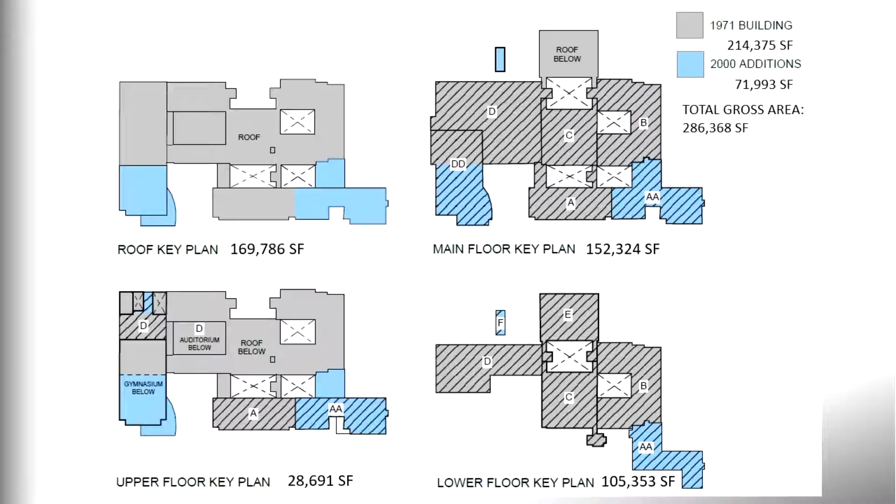There's some interior courtyards, one of which is just outside the window here. So there's a lot of surface area that we need to look at. The color coding is simply just to show you what parts of the building are original and what parts have been added to.

So now let's get into some of the work items. We'll start with scope number 1, our highest priority items. We'll start with roofing - roofing is a big issue here. You can see in the images that we're getting a lot of ponding, which is that water that won't drain. The roof is over 20 years old, and it's just about the end of its useful life.

There are several active and ongoing leaks in the building which are being managed, but leaks don't stop until they're fixed. So we would clearly recommend replacing the roofing in its entirety. As you can see, those are some pretty big numbers, probably almost 10 million there between the two sections of the building.

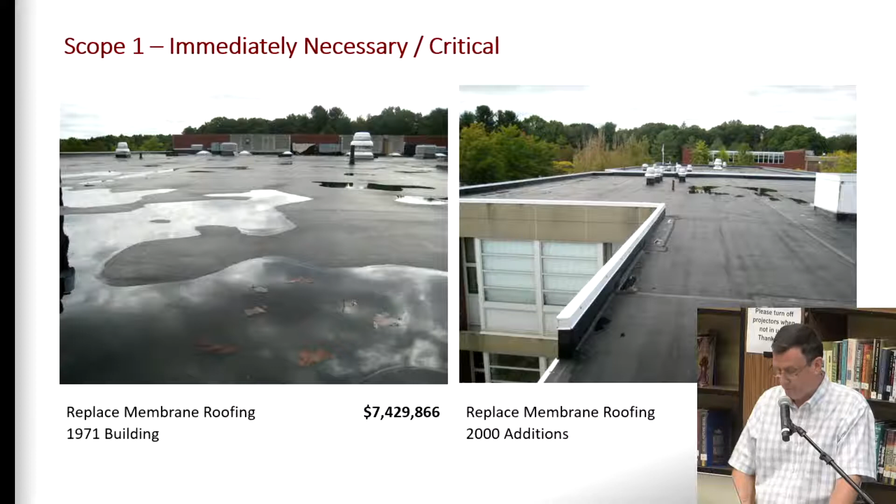Also, up on the roof, we have a lot of our mechanical equipment. This is the equipment that provides heating, ventilation, and cooling. This equipment is also just about the end of its useful life. They're becoming increasingly expensive to maintain. The type of refrigerant used in some of the units is being phased out because of its contribution to greenhouse gas emissions. Units are not being manufactured with that type of refrigerant anymore. And the units are not nearly as efficient as a new unit that we could engineer today. The technology has evolved quite a bit.

You can also see on the image on the left that there's some ductwork that runs across the roof. There's quite a lot of this. That ductwork should be insulated to keep that thermal energy inside the duct where it belongs so it can be delivered to the spaces below. But that insulation has completely failed. In some cases, it's just gone. In other cases, as you can see there, it's falling apart and crumbling. So there's a lot of energy being wasted here.

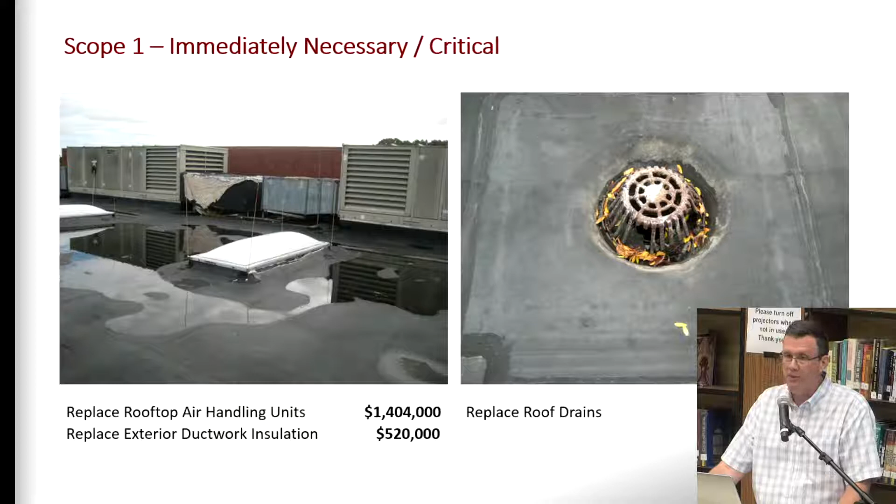I group these with the roof, and the roof drain falls into this category as well, because it's often cost effective, if affordable, to address replacement of the rooftop mechanical units at the same time as replacing the roofing membrane. The reason why is because in order to flash things properly, what we want to do is temporarily take those units off of their curbs, put the membrane in properly, and then put the unit back on. But of course, that costs money. So if it is affordable in the budget, what we recommend is to consider replacing those units at the same time as the roof. Altogether, that's going to save you money.

Other Scope 1 items: the egress doors around the perimeter of the school are in pretty rough shape. A lot of them are rusting. They're not weather tight, they leak constantly, and they're causing damage to the interior just beyond the threshold, affecting the floor.

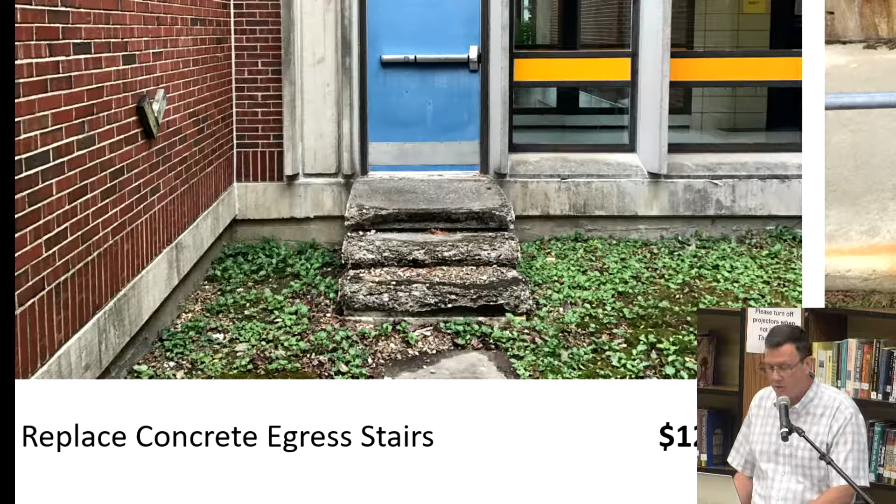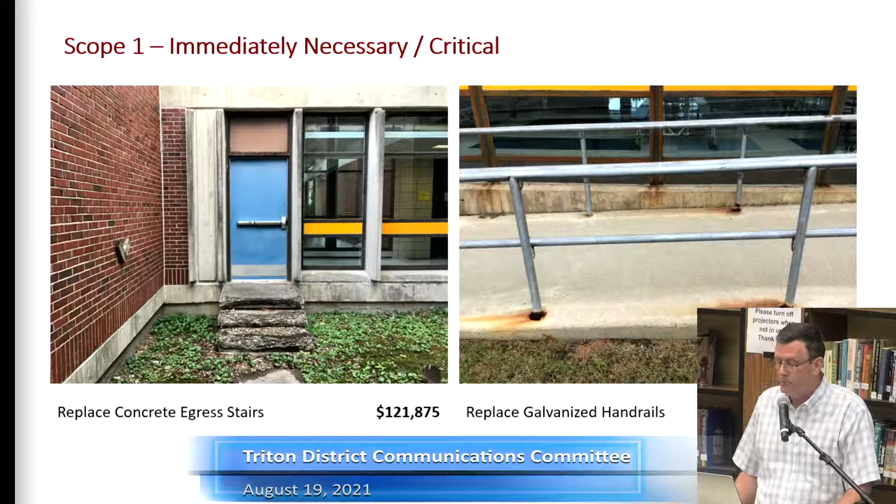More exterior items, these are in the 1971 portion of the building. The image on the left is in one of the courtyards. I have a little magnifying glass - there it is. So you could see those concrete stairs are almost gone, just from weathering, and all of those need to be replaced. There are handrails on the exterior as well, made of galvanized metal. Even galvanized metal eventually will fail if it's scratched, especially. These handrails are failing as well - this is a potential safety issue. In this particular image, this post right here is just separated completely and is just hanging there in the breeze. Not a safe condition.

Other areas on the exterior in our Scope 1 category - on the left is the pylon that we all pass when we come here to the entrance to the school. That has a glazed concrete block, which is that blue color. There's a lot of water infiltration in this pylon, and so it's basically rotting from the inside out, and the blocks are starting to crack and spall and fall off. That really either needs to be removed if it's not needed, or replaced in its entirety.

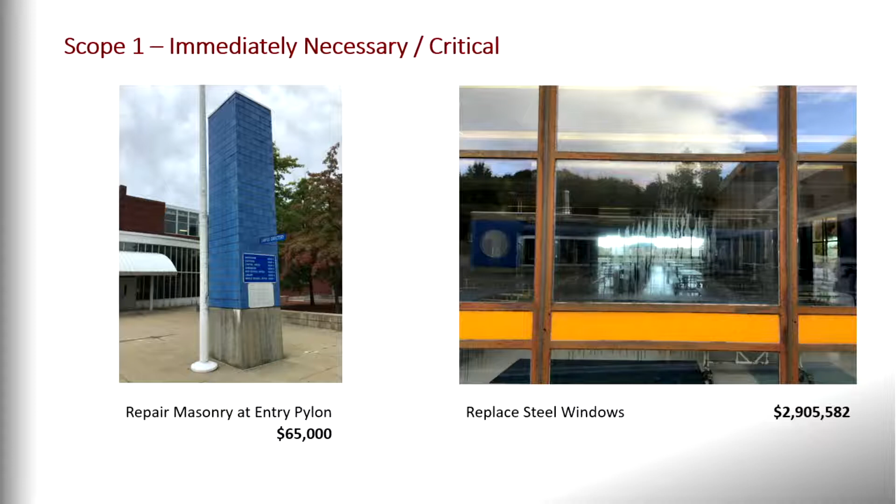The original building was built with steel frame windows, so you can see the rust developing on the frame. I believe this room has those type of windows. When the school was renovated and added to in 2000, all of the glazing was replaced. Originally they were single pane windows, and they were replaced with double pane in an attempt to make them more energy efficient. The frames were never really intended for that, and unfortunately they're starting to fail.

The seals around the perimeter are failing. The seal between the double glazing is also failing. In a lot of places you'll see, like in this image, condensation forming on the inside of the glass. That's not going to go away, it will only continue to get worse over time.

It's important to mention that there's a lot of energy also being lost through these windows, so there's some potential cost savings on operating costs over the long term to do a window replacement with more efficient windows.

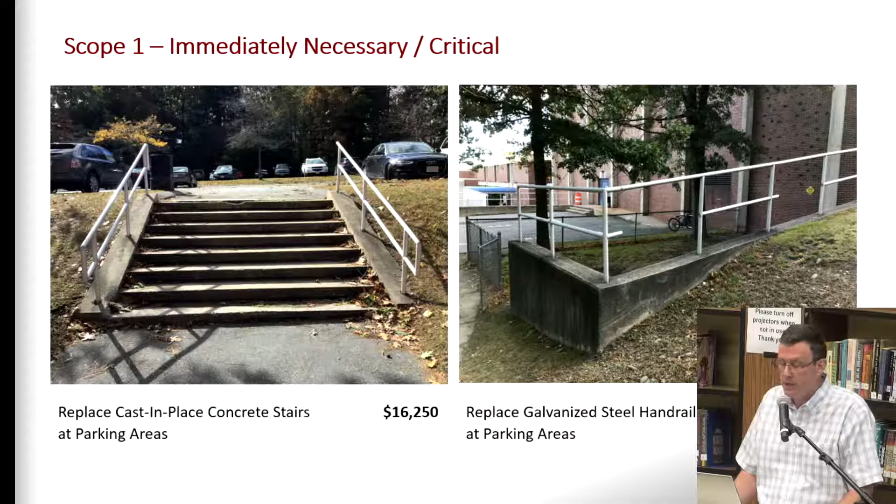More items on the exterior, more concrete. There's a lot of it. We have some issues with some of the stairs out in the parking area where the treads are starting to crumble and fall apart, a potential safety issue. Handrails are in rough shape as well. Some of them are missing components or detached or rusting badly and about to detach.

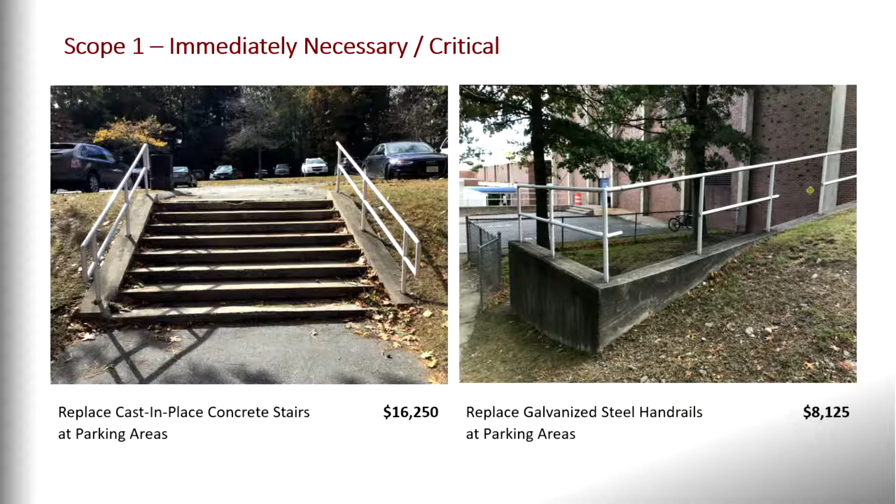So now we'll look at some of the Scope 2 items. These are items that do need to be addressed, but are perhaps less urgent than the items in Scope number 1. We would recommend that these items be addressed, if possible, within a 2-year period.

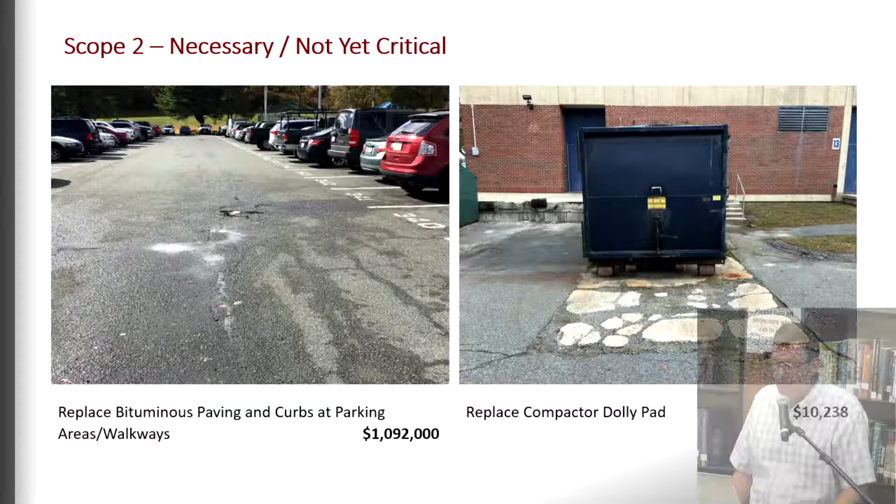More paving. This paving is not as badly damaged as the paving in Scope 1. I think this image is in the rear parking lot. Is that where the students park? I think so, yeah.

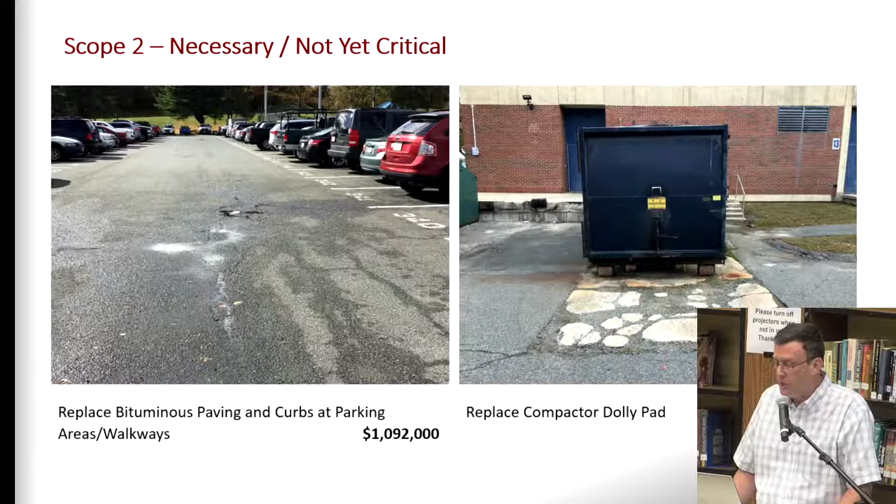This is starting to go as well. It's got a little bit of life left in it, but it will need to be replaced eventually. The pad underneath the compactor clearly is almost gone.

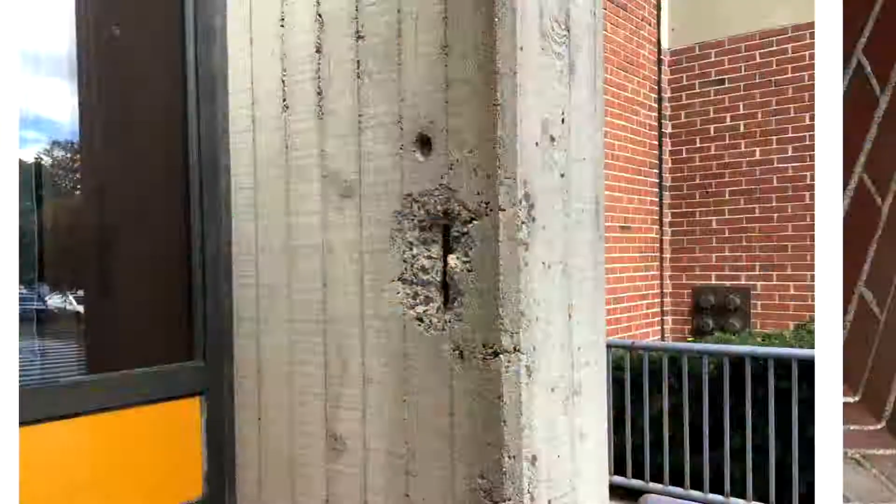The older portion of the building has lots of concrete. Once a crack forms, water gets in, starts to freeze, and it pops that concrete right off the face of the building. This is an example of what we call a spall, an area where water has gotten in there and frozen, pushed the concrete out, and you can see there's a reinforcing bar that's become exposed. You might see this on a highway bridge by the side of the road. It's the same issue.

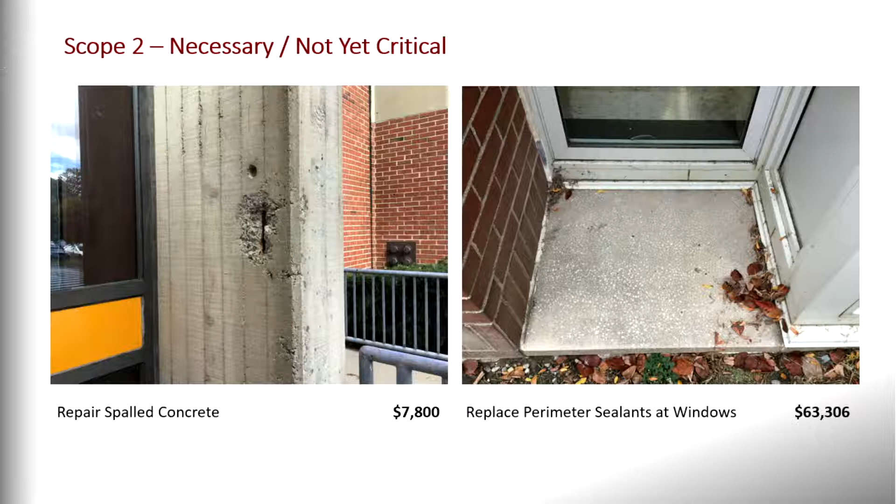Around the windows, in the image on the right, these are aluminum windows that are part of the middle school addition. All of these windows have a seal around the entire perimeter of the window frame. There's a lot of it. Those sealants generally start to fail after about 20 years, and we're just about there. That will continue to get worse over time, and eventually those sealants should be redone. That's a pretty common maintenance item that we see in almost every building that we look at.

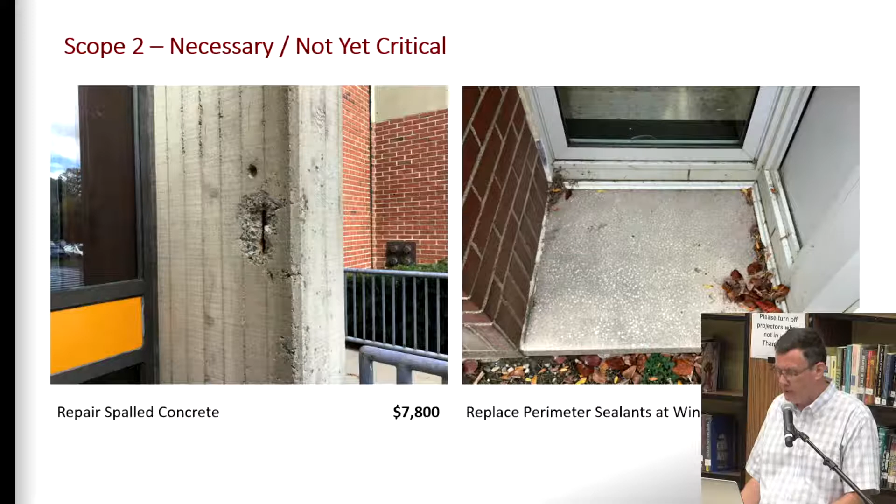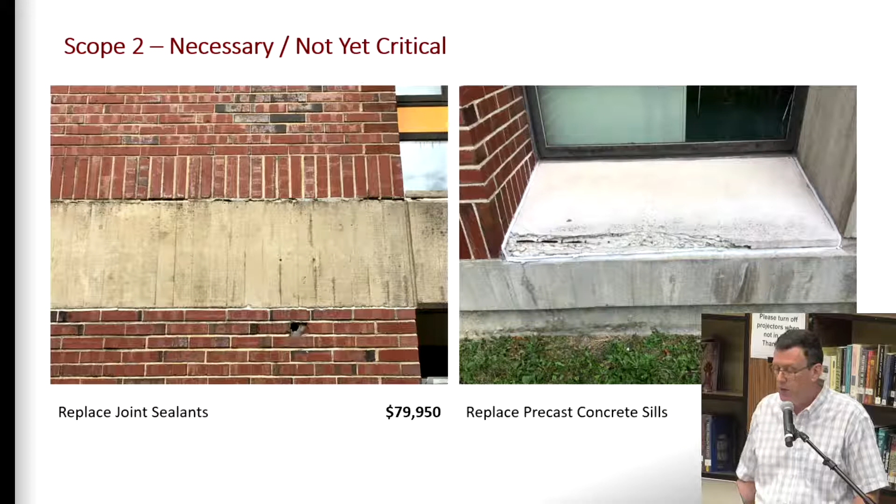On the right, in the older portion of the building, a lot of the windows at the ground floor level, and we may even have that condition right out here, have precast concrete sills. The windows are set back quite a ways from the face of the building, but that creates a shelf that tends to collect water, and the edges of those pieces are just falling off. Here's some rusting reinforcing bar that's been exposed.

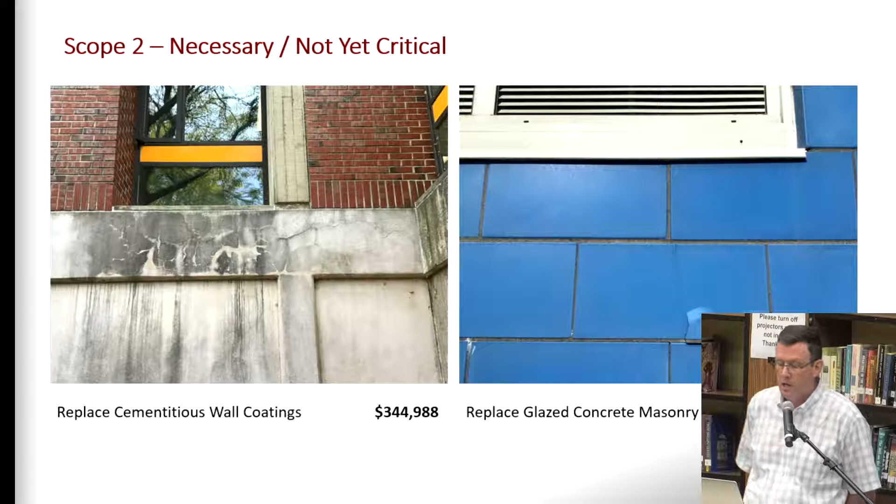In some areas of the building, there was a coating applied during the 2000 renovations. I'm not sure what it is, but it's clearly failing—it's cracking and falling off. We see these in the courtyards, and I think at the gymnasium entrance there's quite a bit of this as well. It's also very moldy, maybe even some algae growing in the wet areas, but that material needs to be removed in its entirety.

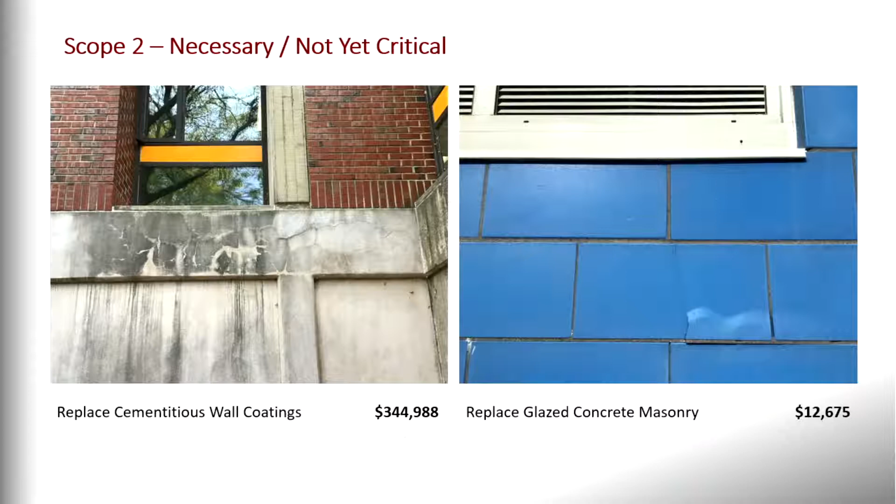Here's an image on the right of that glazed concrete block we looked at before at the entry pylon. There's more of this on the middle school, and this crack you see here is happening in quite a few places for the reasons I've described before, related to moisture infiltration. Some of those need to be replaced.

Still in scope 2, we'll move to the interiors.

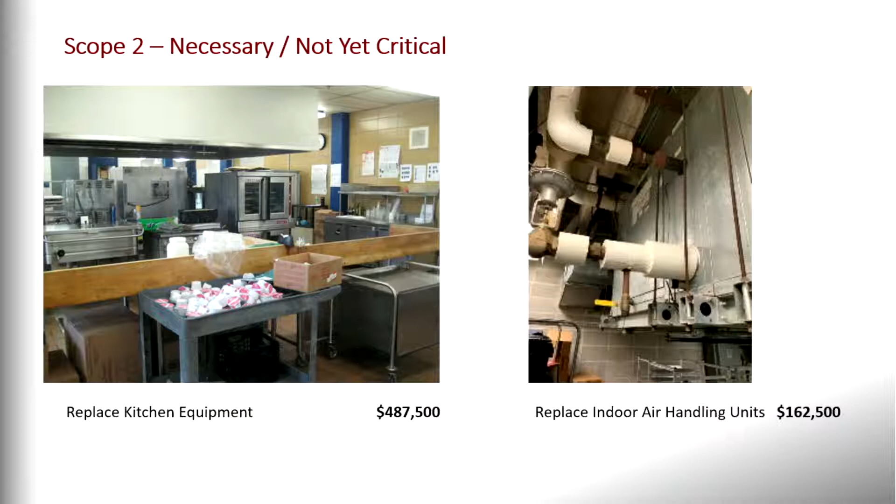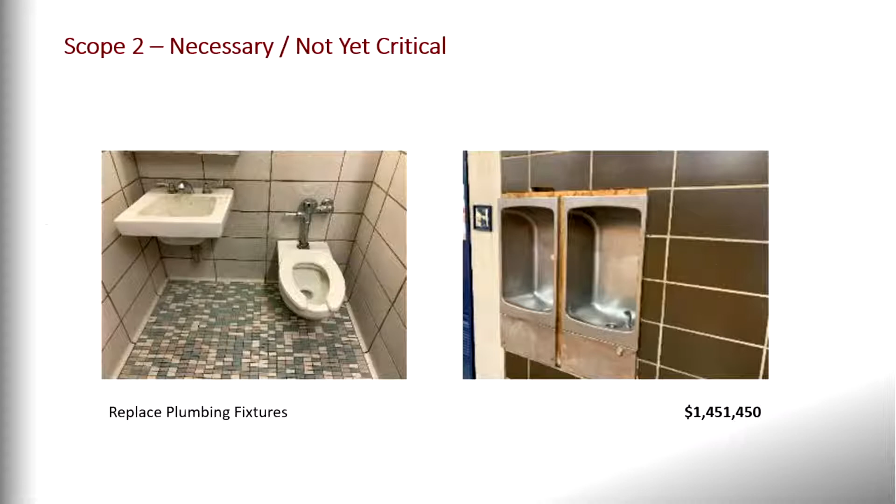So now we're in scope 3, this is the 2 to 5 year range, and we're back out on the site. These are some of the lower priority items that should be addressed, but they're not quite as compelling as the items we've placed in the first 2 scope categories.

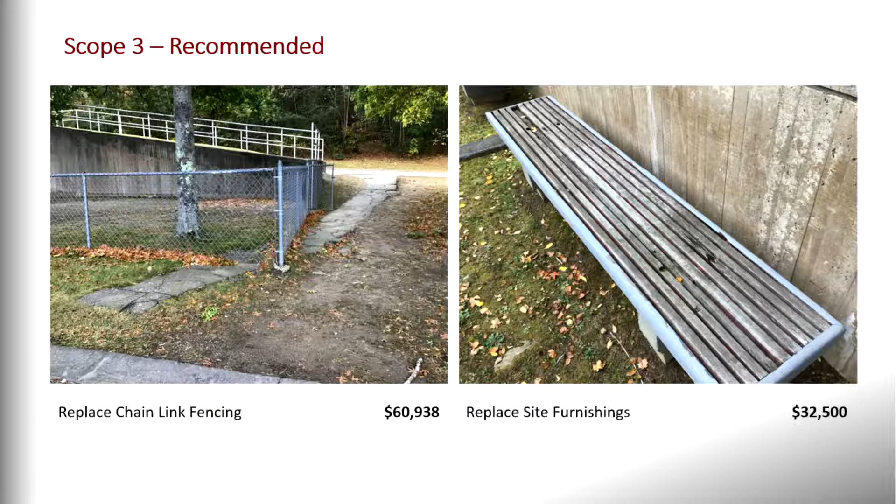Chain link fencing is in need of some repair, especially in the parking area. I know this is one of the other items that Chris was especially concerned about, the parking area where we enter the site.

There are a lot of furnishings out in the courtyard areas. Most of the original ones were made of wood, but they're pretty rotten and starting to splinter and fall apart. Some of the metal furnishings added outside of the middle school are also starting to rust.

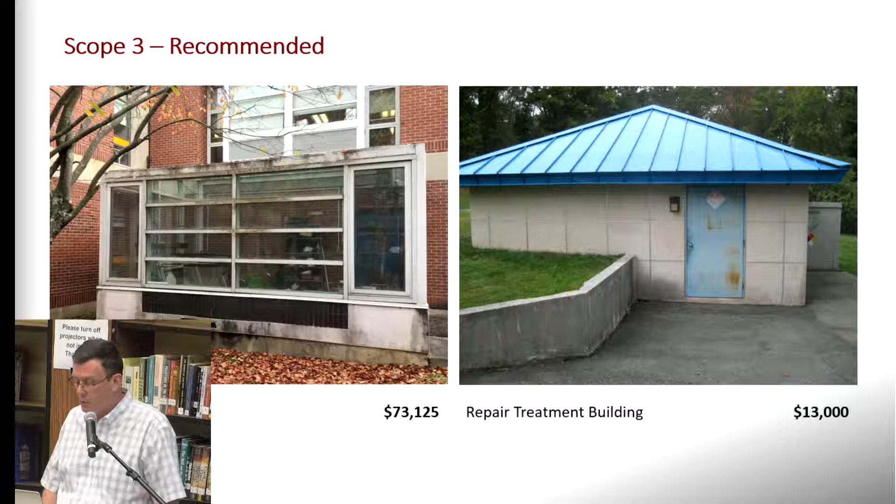The treatment building, a small outbuilding out behind the school. This school has a sewage disposal system, and the equipment that treats the sewage is located inside this building. It does need a little bit of work. It's in pretty decent shape, but could maybe use a roof replacement, and that door there is also starting to rust.

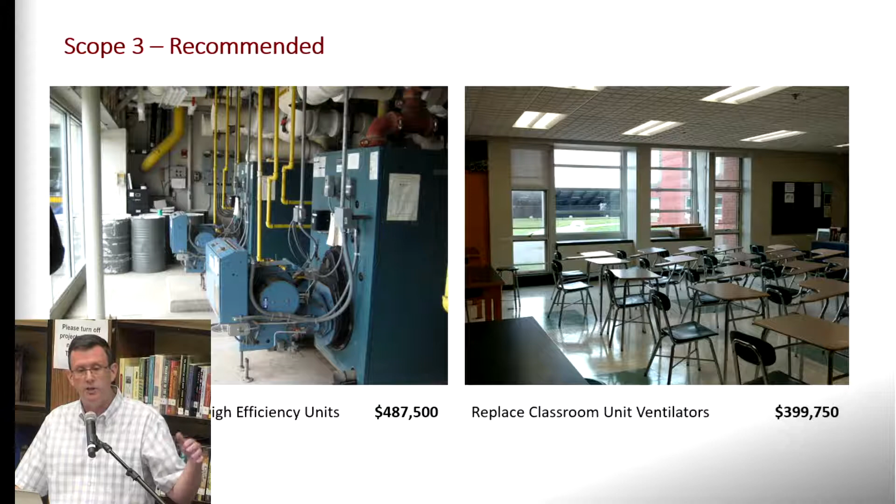The unit ventilators, hard to see, but in the image on the right you see these two units in front of the windows. This is a typical mechanical unit you'll see in classrooms in many different schools. What it does is bring fresh air directly from the outside, heat it, and then distribute it to the classroom. Our engineers have said those units are approaching the end of their service life and could be considered for replacement. They're also very costly to maintain, and they don't provide any cooling or dehumidification—that's heat only.

Back to the kitchen, there's some potential energy savings by adding an exhaust control system to the hood that modulates the volume of air that's being exhausted through that hood.

The dishwasher doesn't have any exhaust, and it needs to. Every commercial dishwasher needs to have an exhaust. There's a ton of moisture that gets into the air that we want to get out of the building right away. That might be worth close to $50,000 to add one.

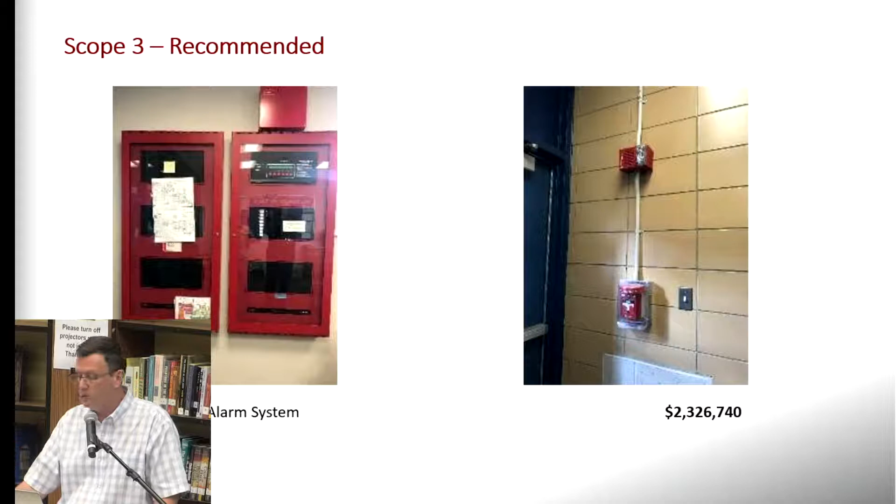The fire alarm system is perfectly functional. It's a manual system. It doesn't include every single feature that we might find in a new school, and the one in particular I'm thinking of is the recorded voice message you'd find on a new system. When the system goes into alarm, there's a message that comes on that provides instructions about what to do and where to go. That's probably a lower priority item, and again, something that might be considered if there was a very large-scale renovation where a large portion of the school was being renovated at one time.

Lighting - so we have fluorescent lighting here. Replacing it with LED, I'm sure everyone's familiar with LED technology, is a strong thing to consider for the energy savings, and also some improvement in light quality. I think the fixtures themselves are able to deliver a higher quality of light than the old fluorescents. Adding an automated control system there will also enhance energy savings and allow better control from facilities.

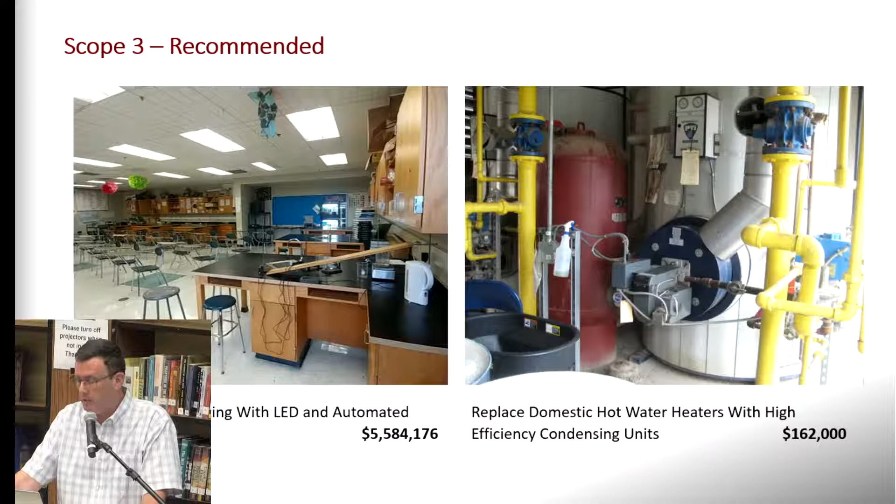The domestic hot water heaters, the item on the right side, these are the tanks - we all have them in our homes, these ones just happen to be very, very big. This is original equipment, this is what heats our hot water. But it's way past the end of its service life, and I'm surprised there hasn't been a major issue, but I've been told that there hasn't. These can be replaced with high efficiency units, and sometimes these are done in tandem with a boiler replacement as well.

Other items - we don't have images for these - but the heating, ventilation, and air conditioning control system, part of it is a pneumatic system which runs on compressed air. That's an obsolete technology, very difficult and sometimes not even possible to service or maintain. That's run by a compressor. What we like to see is have those systems converted into a direct digital control system, which is monitored by a computer. It allows facilities people to basically operate the system from a computer screen and even from a smartphone.

More lighting on the exterior of the building, the poles out in the parking lots, those could be upgraded to LED.

There's several of these low voltage systems that you'll find in almost any school, typically a security system that has intrusion alarms, key card access, and closed circuit TV monitoring. The systems in this building are all separate, but what we'd find in a new school is a platform that integrates all of these systems together. It's an open source platform that allows the integration of security, card swipes, and monitoring all under one system.